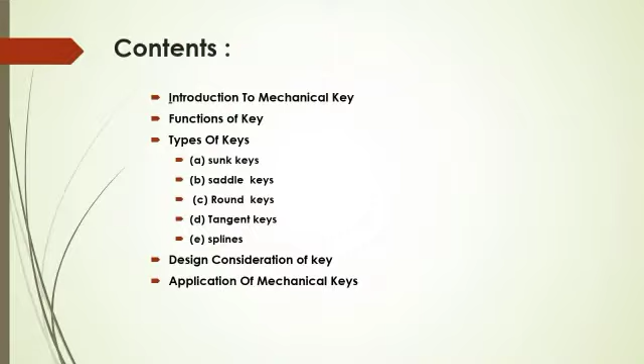Let's begin with the micro project. In this video, we are going to discuss the fabrication and types of keys. First, we see the content: introduction, function of a key, types of key, design criteria of a key, and last is application of a key.

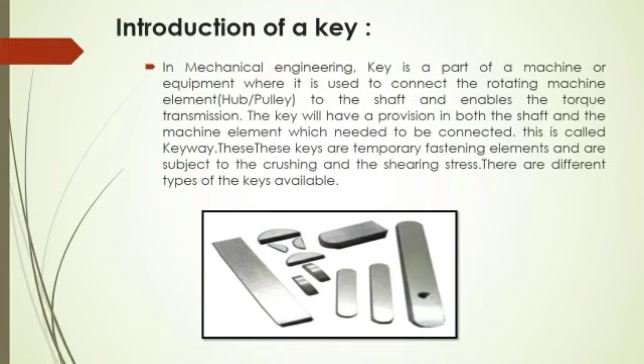Now see the introduction. A key is a part of a machine or equipment used to connect a rotating machine element to the shaft and enable torque transmission. It is available in different types.

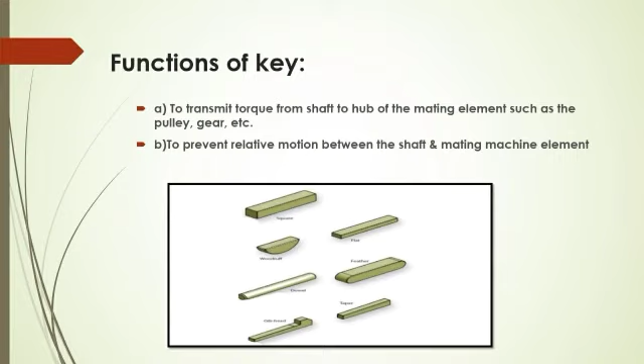Function of a key. There are two main functions of a key: to transmit torque from the shaft to the hub of the mating element, such as the pulley, gear, etc., and second, to prevent relative motion between the shaft and mating machine element.

Types of key. They are divided into 5 different types, such as sunk keys, saddle keys, splines, round keys, and last, tangent keys. Now we see them in detail.

First type of key is the sunk key. When a key is provided with half portion in the shaft and the other half portion in the hub, then the key is known as the sunk key.

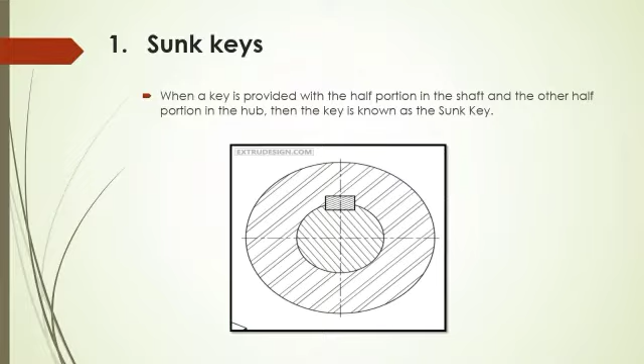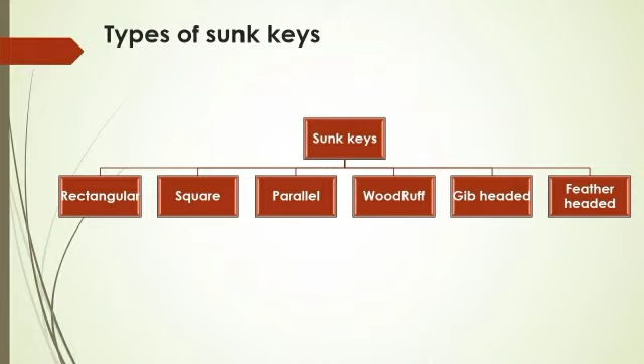Sunk keys are divided into 6 subtypes: rectangular, square, parallel, Woodruff, gib-headed, and feather-headed. The first type of sunk key is rectangular.

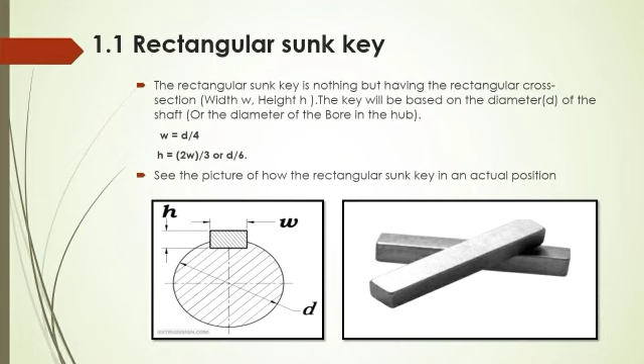Rectangular sunk keys are shown in the figure. They are the simplest form of a machine key and may be either straight or slightly tapered on one side. The parallel side is usually fitted into the shaft.

Second type of sunk key is the square sunk key. It is nothing but having a square cross section. In this type, width and height are equal.

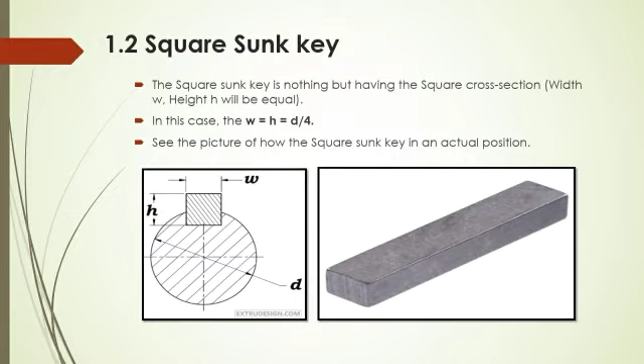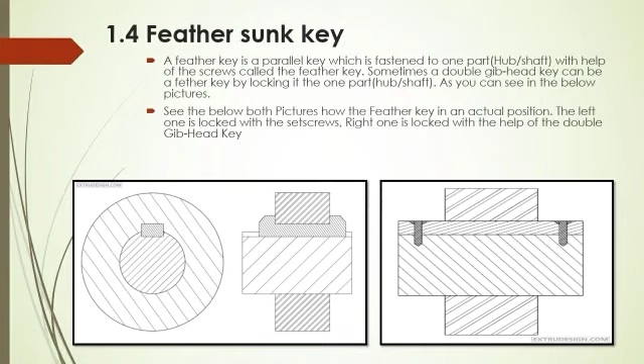Second-last type of sunk key is gib-headed. Gib-headed keys are ordinary sunk keys tapered on top with a raised head on one side so that they can be removed easily.

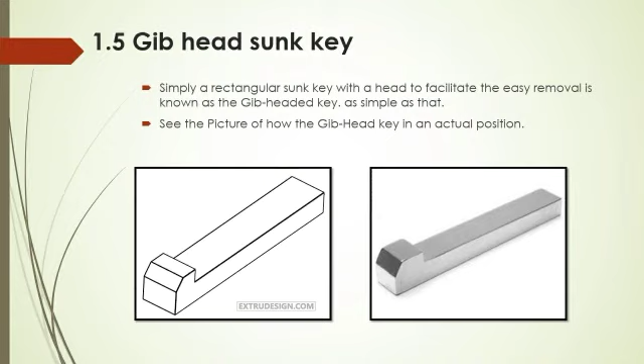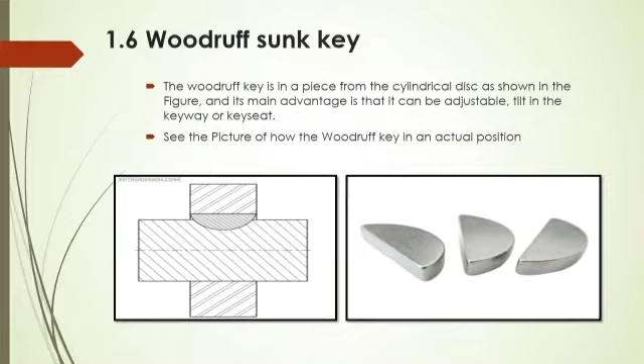Second type of key is the saddle key. These types of keys are rarely used because they cannot transmit high torque. They are classified into two types: hollow and flat.

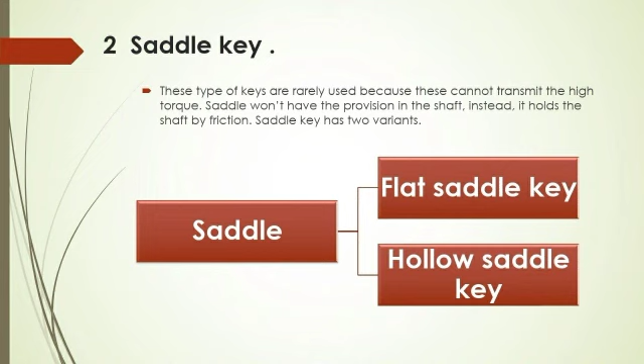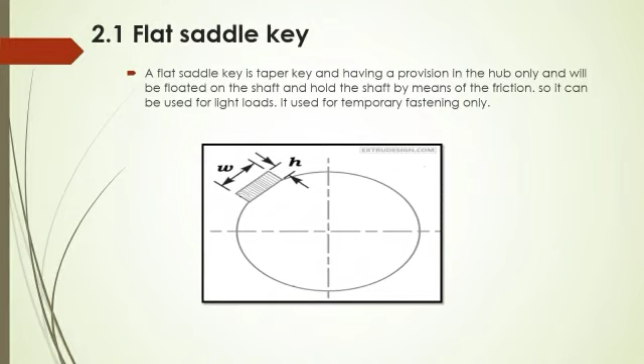Flat saddle keys, as shown in the figure, are used for lightweight applications because they depend entirely on friction for the grip. The sides of these keys are parallel, but the top is slightly tapered for a tight fit. These keys have half the thickness of a sunk key.

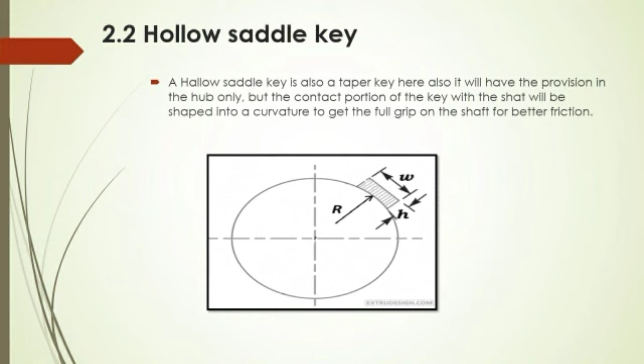Second type of saddle key is hollow. Hollow saddle keys are shown in the figure. It is very similar to flat keys except that the bottom side is concave to fit the shaft surface. These keys also have a friction grip, therefore they cannot be used for heavy loads.

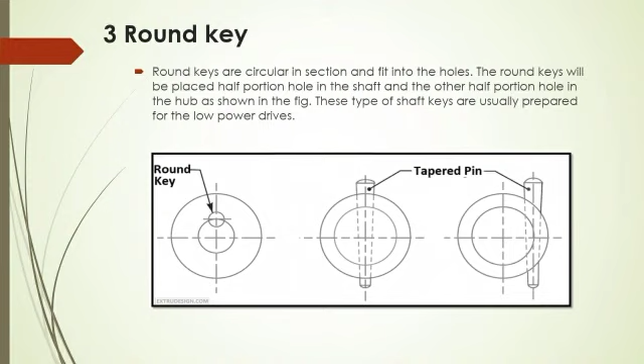Round keys are circular in section and fit into holes. The round key is placed with half portion in a hole in the shaft and the other half portion in a hole in the hub, as shown in the figure. These types of shaft keys are usually prepared for low power drives.

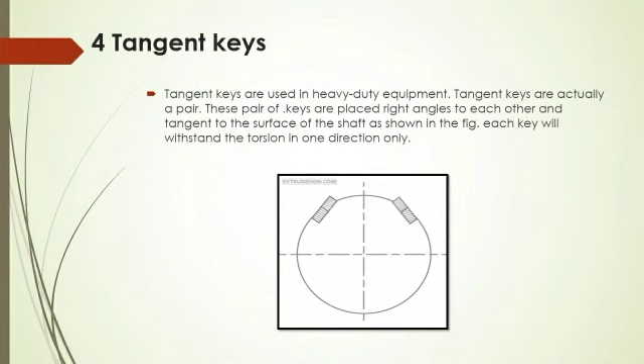Second-last type of keys are tangent keys. Tangent keys are used in heavy duty equipment. These are actually in a pair, placed at right angles to each other and tangent to the shaft.

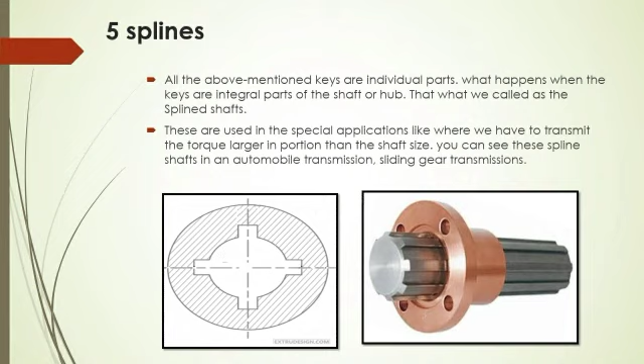Last type of keys are splines. Splines are used in special applications where we have to transmit torque larger in proportion than the shaft size. Design criteria of a key: power to be transmitted, tightness of fit, stability of connection, cost, crushing failure, shearing failure.

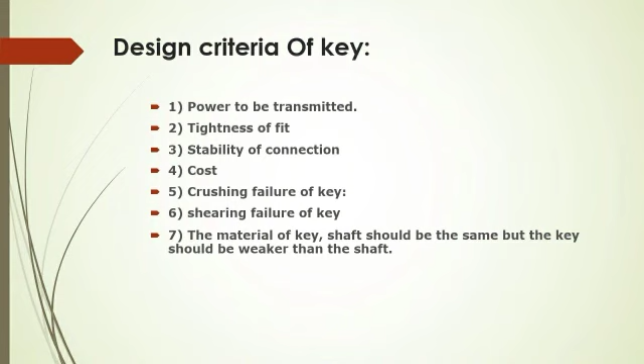And the last criterion: material of the key and shaft should be the same, but the key should be weaker than the shaft. Application of a key: sunk keys are used for heavy duty operations.

Rectangular keys are used for preventing rotation of a gear and pulley on the shaft. Gib-headed keys are used where the key needs to be removed frequently. Feather keys are used in machine tools.

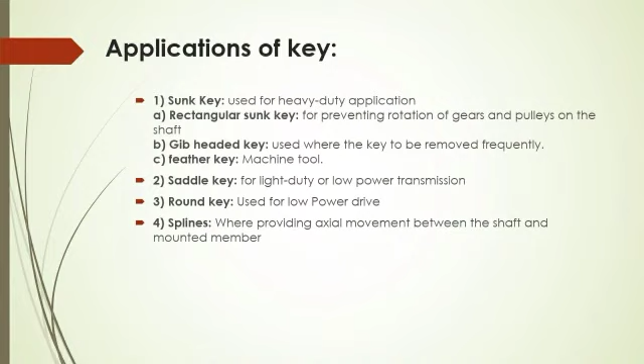Saddle keys are used in low power and light duty operations. Round keys are used for low power drives. Splines are used in special operations where we have to transmit torque larger in proportion than the shaft size. Thank you.